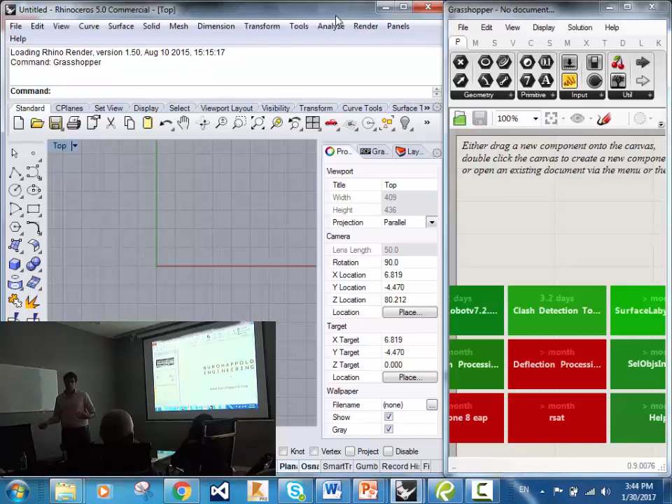So that's a little bit about what we're doing globally. Now this week, we're here to talk about parametric design,

which a lot of you know looks like this. If we could, can we turn the light on real quick? So for me, I like to start these types of seminars

by stressing one thing: this is a tool. It doesn't replace anything that you do. It doesn't replace you, it helps you. It's an extension of your engineering mind. That's all it is. And at the end of the day, it will not replace you with a piece of paper and a pen in your hand.

So that's why I always like to start off and just know that every single one of the scripts you're going to do is going to start on a piece of paper. If you're not doing it that way... I've been using it for 4 years, every single one of my scripts that I start, it starts on paper. So if I try and do it without it, I can maybe do a good job, but it's not even comparable if you're not using a piece of paper. It doesn't replace your mind, remember that.

So I have this little principle I made up that I started when I first started doing Grasshopper 4 years ago: programming equals geometry, geometry equals programming. The cool thing about our industry is we actually deliver things that are in 3D, so it really behooves us to be able to work in 3D, to understand things in 3D and set them out that way. The geometry part is the important part.

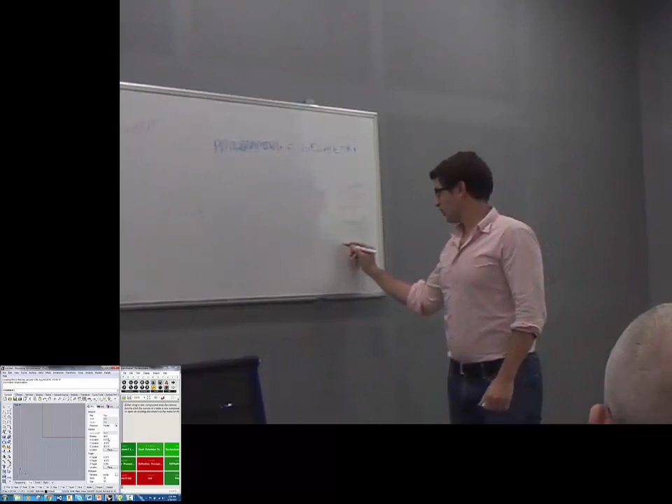Anything else? Anybody going to be a real nerd and say polynomial equation or something like that? It could be something like x squared plus bx plus c or something like that, right? Well, maybe I'm too much of a nerd. But what you guys just shouted out, that's not enough, that's too much. That's still me drawing random lines, an infinite amount of possibilities there, and still an infinite amount of possibilities here.

So we need to pick one. I would say we can pick any of them, but just because I'm ready to do this one: 3 points. 3 points defines an arc, right? We can figure out some sort of line that goes through that. And intuitively, I know there's a tool in there that will take 3 points and figure out the radius and everything for us, okay.

So that's cheating a bit, but that's why it's important to get your feet wet, because it's sort of like a self-fulfilling prophecy. The more you use Grasshopper, the more you know about it, the more you're able to sit down at this table and actually say, I can already foresee my last component is going to draw it for me, and it requires 3 points. So we know right away we want a 3-point arc, we better have a third point up there somewhere.

So right now those are our parameters. Is that enough? Is that really enough for us to do it? We need some other information. What other information? You need a plane. What else?

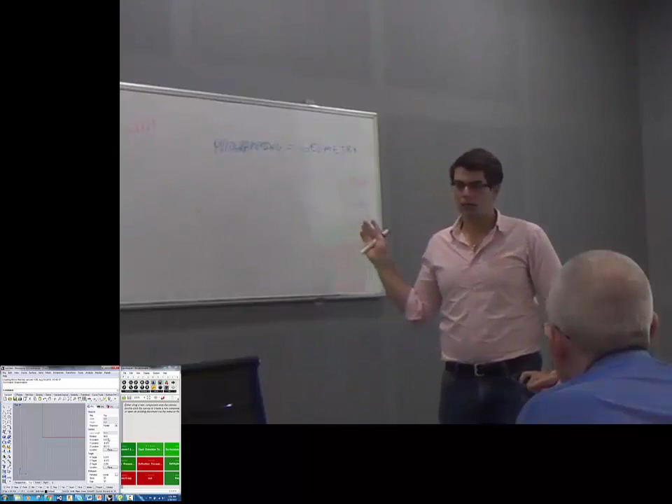Remember, our output is that. So we're drawing this picture, we're thinking our end game is this. And how do I break that down into something a computer can understand? This is the really important part of all of this stuff: the sacrificial geometry. All of this jazz over here is just sacrificial.

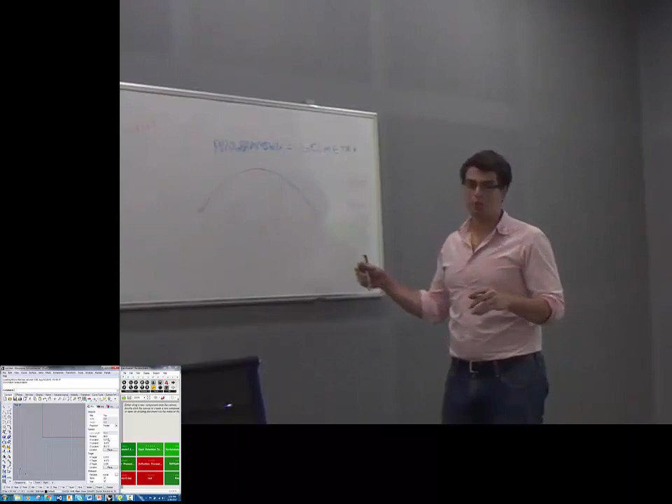We're creating 3 points to create this curve. We've got 2 parameters in here. Most of the definitions you will come up with will have more than this, actually, and it's just the amount of steps that you go through. We can walk through examples later in the week where you create so much line work just to come out with something simple. But the main benefit is once it's done, it's done forever, and you can roll with the punches a lot quicker.

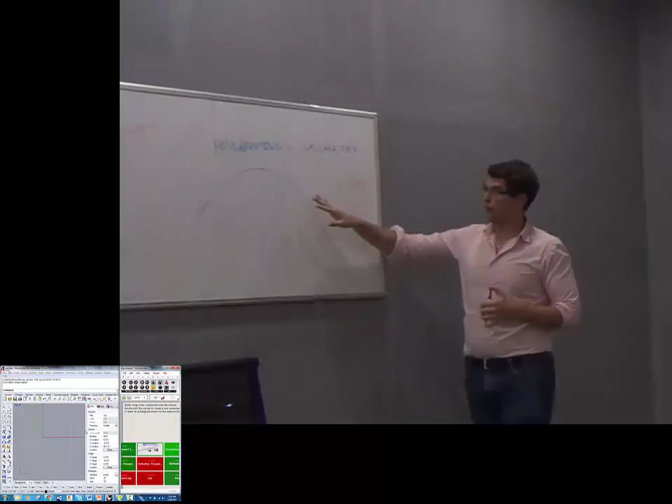So let's take this as the basis of our example here, and let's do it in Grasshopper. Before we start, I want to stress, this week we are going to try and do as much as possible without being too confusing. We're going to use Grasshopper first, then Dynamo. Dynamo is going to be really important for those of you using Revit a lot.

I go to Grasshopper first because I still submit that Grasshopper is a better way to learn. Dynamo is very new, and it has things that I just consider to be bugs. Last week I saved a file, opened it back up, and all my groups had disappeared.

That's just a little bit unstable. Doesn't mean you can't learn from it, and doesn't mean it's not a good tool. Just know, if you're starting from scratch, you're probably going to have less headwind if you're using Grasshopper. So we'll start with Grasshopper this week.

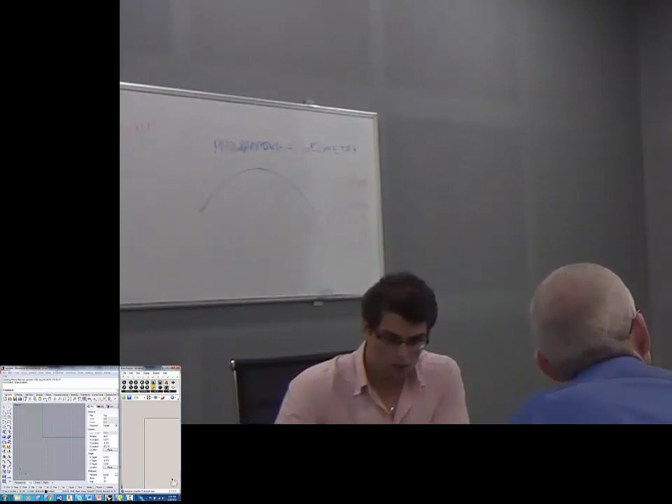Remember our principle. What was the principle that we started off with? Programming equals geometry, and geometry equals programming. So on the screen right here, what you're seeing is those two things in software form: geometry, as you all know it right now, CAD, and programming over here on the right.

Most of you know this already. The programming is not something that's scary, scary, scary. It's actually pretty easy to learn. There's something called visual programming.

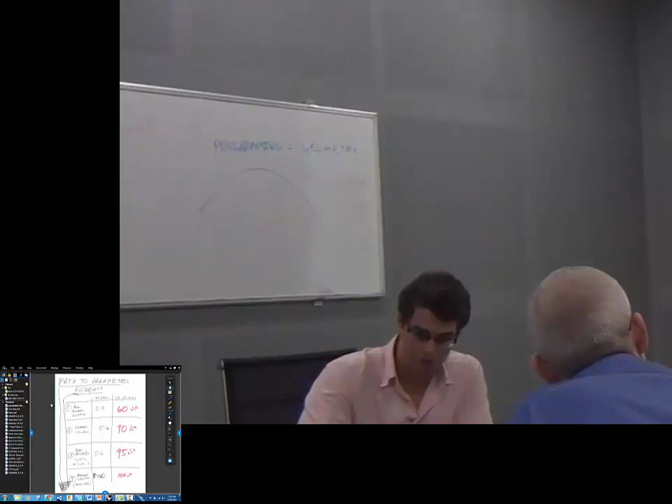Just to show you how easy I think this is, I made this little thing a long time ago. If you wanted to learn basic parametric scripting, I believe it would take you 2 to 3 days of just knocking it on, not even full days, just playing with it. By the end of this course, I'd expect most of you would probably be here.

Just to give you an example, the 60% means you're 60% fluent. You're gaining 60% of the benefits of being a parametric designer rather than just a normal designer.

I say conservatively, it takes you another 5 or 6 days to get to the data tree structures, which really puts everything we're going to talk about on steroids. We're going to cover that tomorrow. If you can get data tree structures down, you are, in my opinion, dangerous.

You could actually probably, arguably, be replacing the efforts of someone else. You could probably do something in minutes that takes someone else a day. There are examples of this.

The next level up is the stuff people get scared of, but it doesn't apply to everybody: Basic, Visual Basic, C#, even Dynamo Studio scripting. Stuff like for loops, while loops, all these things that people go 'oh, I can't do that.' But no one really likes that. We're designers, we don't like to deal with that stuff. That's not what you'll be dealing with in most cases with parametric design.

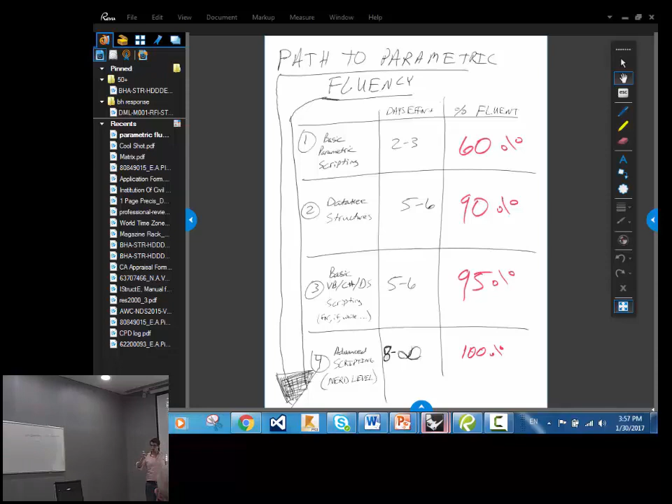But it's not hard to get to. It's almost like I speak Italian. Anybody else here speak Italian? That's right - if I got up on the board right now and taught you 10 words in Italian, you could all go live in Rome. That's what learning this stuff is like. It's that much of an impact for that little of an effort. It doesn't take that long to get down.

All right, let's do it. Any questions so far?

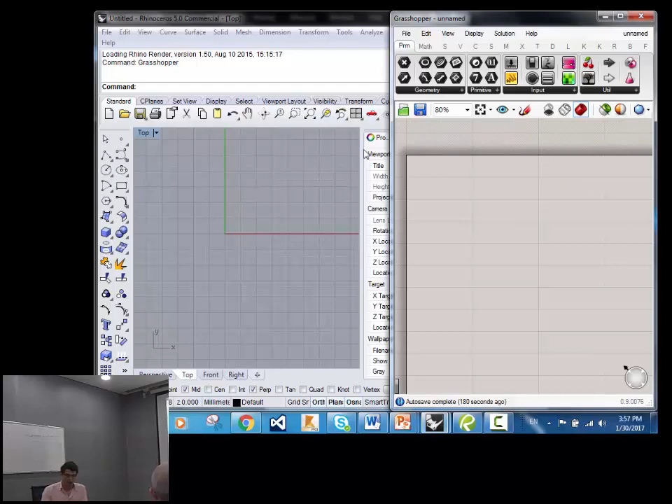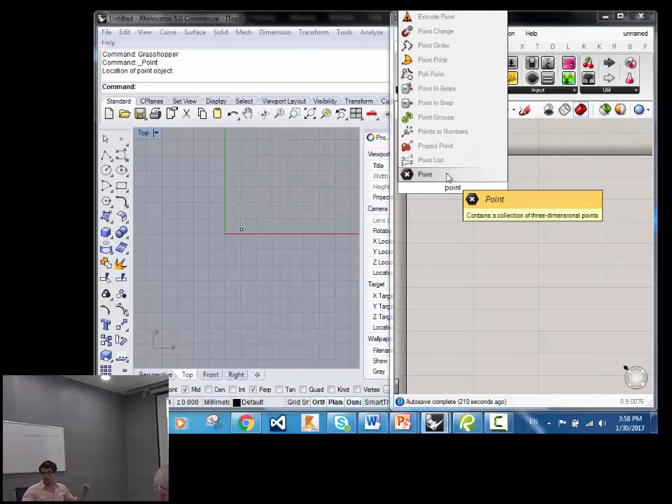Let's start by creating some geometry. There's a point. And what am I going to do with that point now? Let's say I just created that point. I need to create a second point that's a distance away from it along, let's say, the x-axis. Let's make programming equal geometry.

If I come over here, I double-click the canvas. Most of you know this already - you can type out commands. And you can make information jump across the media via right-clicking, and you go set one point. Boom.

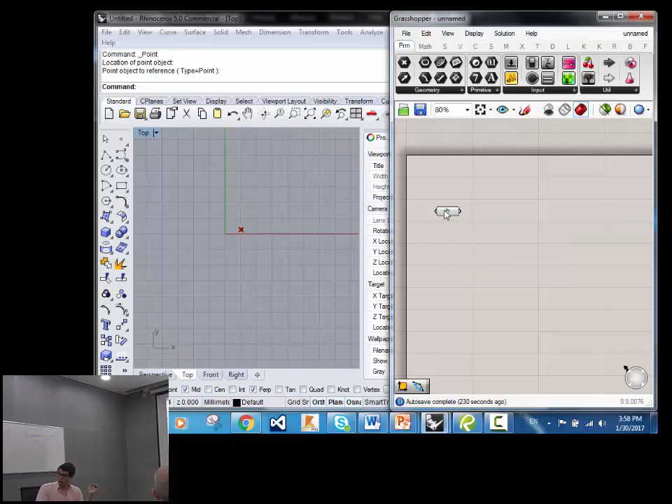If you haven't been introduced already, green mode and red mode up here, very important. If you click on something and you're in red mode, it turns green. Everybody see that? It's very important. And if you're in green mode, the only things you see are green when you select them.

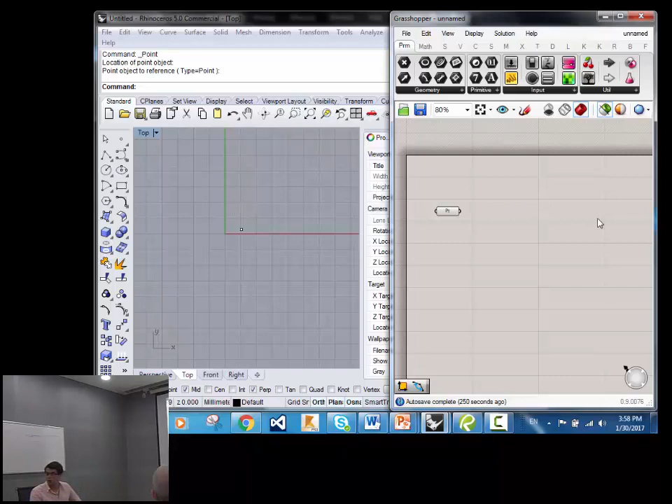Right now what it's telling us is we have a green point out here. This is a programmatic point. We can play on this in programmatic land. So for the rest of this example, we're not going to touch Rhino. We're just going to draw it using algorithms.

So we want to create this, and we already got point 1 there. How do we get to point 2? It's distance a away. Anybody have any ideas what we can do?

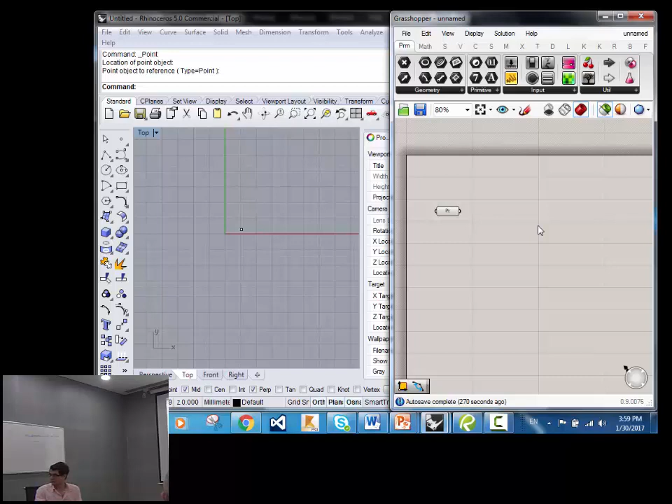Now, for those of you who aren't familiar yet, every one of these little batteries, it's going to have an input and output. It always tells you what it does. Translate or move a point along an object or along a vector. Base geometry, translation vector. Base geometry, sounds like we should put the point in there.

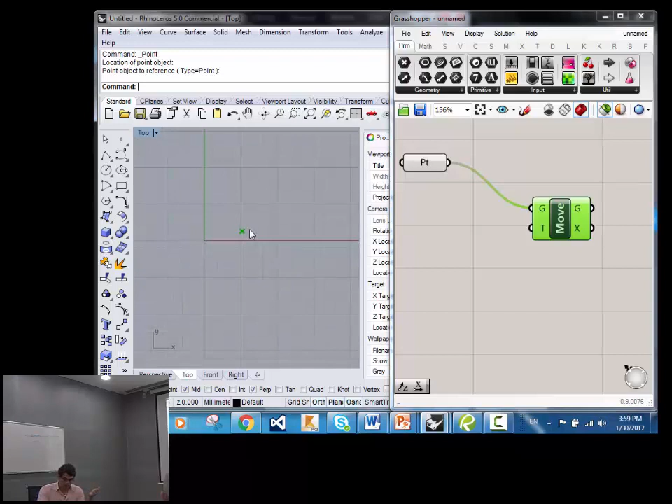Translation vector right now, it's moving it 10 millimeters in the Z direction. So we can't even see it because we're looking at the XY plane here. What can we do? Probably, yeah, put a vector in there. That makes sense for us.

Ah, we've done it. And then where's my number slider go? Behind unit X. Right here, right? Yeah.

Uh-oh, where is it? It's far away. And then, those of you who haven't done your homework yet, I really feel happy for you because you still get this awesome feeling of the first time you play with a slider. You go, ooh, ah. It never stops being fun.

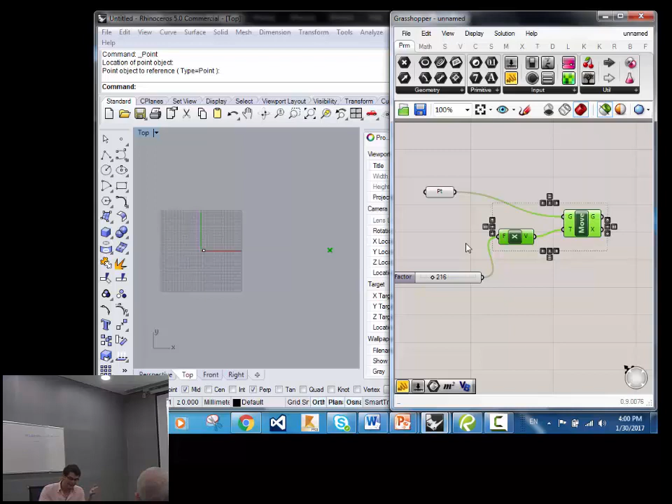So, okay, great. So that's second point. All right, crushing it. All right, anybody have any ideas on point 3 up there, the apex of our curve? How do we do that?

Moving at the same command. Moving it in Y. Which point? Same number slider in Y. Move it in Y, we can give a different vector actually. Give it a different direction.

So which points am I going to move here? I got 2 points, right? And actually, I probably should have drawn this a little bit better. Because if I move either of those ones right now, in the Y or any direction really, you get something like over here, right? We kind of know that just by looking at it.

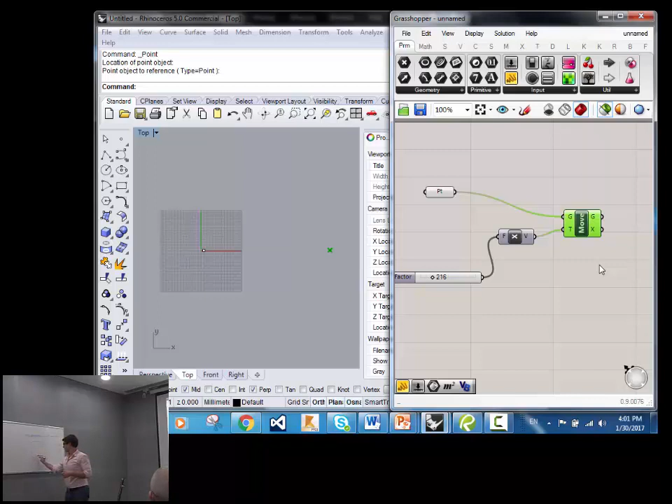So really what we probably want is, we can use 2 vectors, but trying to keep it minimal parameters because we don't want it to be too crazy, like we don't want to have to work too hard. What if we just stick with the 2 vectors we have?

What does it inherently mean? What sacrificial geometry could we create such that this is maintained? A over 2, so that it's centered on these 2 points. Any ideas? So that it is at the middle of those 2 points. It's the line. There you go.

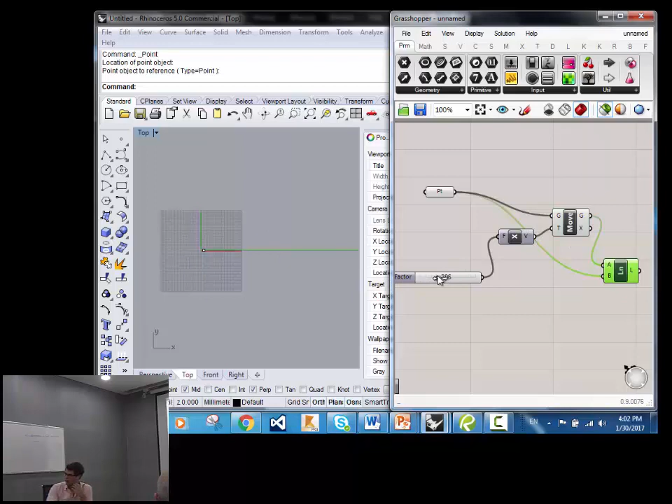So, like I said, sacrificial geometry, you can be thinking, I need to get to the midpoint of those 2 points. I could take the x values and average them, or I could do all these things. But I got 2 points.

That defines a line. Here you go. Remember, still parametric, right? And then you say, I want the midpoint between those two points. You have the foresight to say, actually, it's not called midpoint in Grasshopper, it's called points on a curve. This is just the stuff where you need to text someone on Skype, hey, what is this? Or ask around, someone will know. And then you got the midpoint.

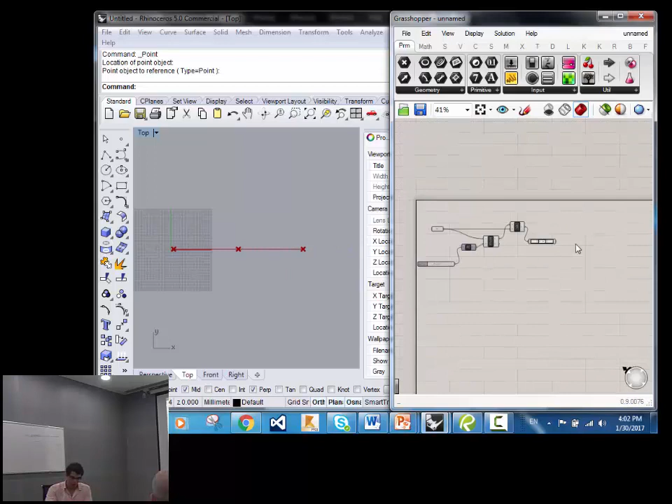So if I turn on red mode, you can see this is all just sacrificial stuff. It doesn't matter, it's just helping us get to our end game. Who was saying before we need to move, right? Now we can do the move. So we take that geometry, move it in the Y.

I think the important part of all of this, and you'll get good at it as long as you're drawing, is thinking ahead, putting the cart before the horse and saying, what is it that I want to get done? So it's not actually just this grand scheme of things, you're almost working yourself step by step backwards to the solution.

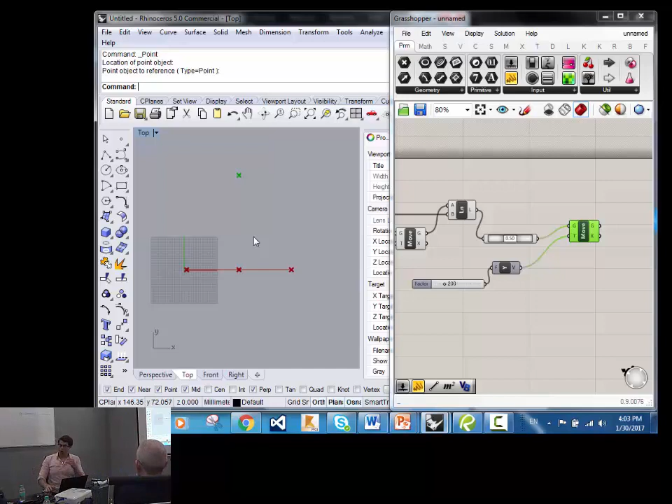Hey, how do I define this point right here? I probably need another subroutine to get me there. All week this week, you're going to see, it's always thinking backwards. What is my final thing? It's about thinking of things in a new way, about breaking things down to their core rules rather than just, okay, 3 points done. It's about letting yourself be available later.

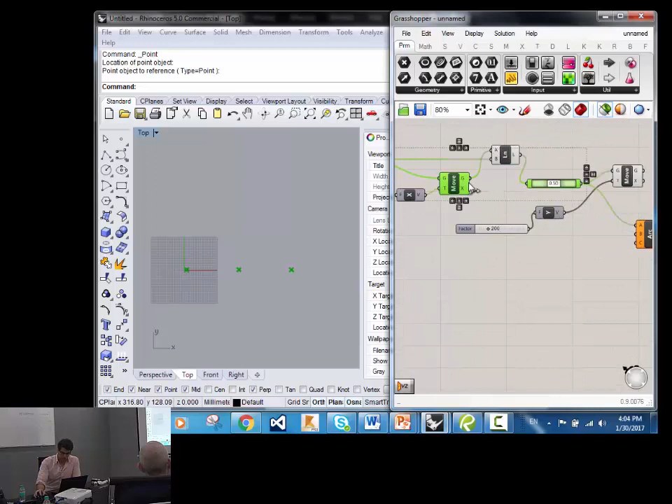And then I'm sure most of you know 3-point arc. In fact, let me demonstrate something. So I got 3 points here, right? 1, 2, 3. Good. All right. 1, 2, 3. Let's see what happens if I put those in.

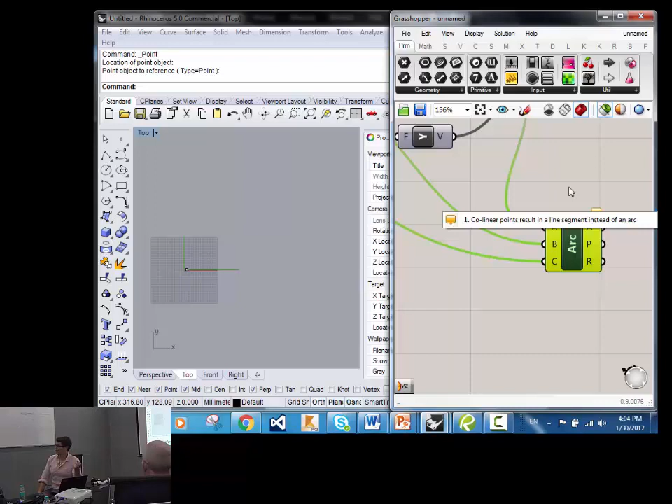If anybody's done computer scripting or even Excel knows when it looks red or orange, it's never a good thing, and it probably means like, you'll look at this, collinear points result in a, I don't care, I don't know what that means, can you just tell me what to do, and it's always some cryptic error.

In this case, it's always beautiful because this is called, I call it visual debugging. Rob May had taught me that term, and I think it's a beautiful term. It's literally being able to look at the problem, a little picture, and know, what's the problem, guys? What's the problem with this picture that we're trying to do here? Why is this thing orange?

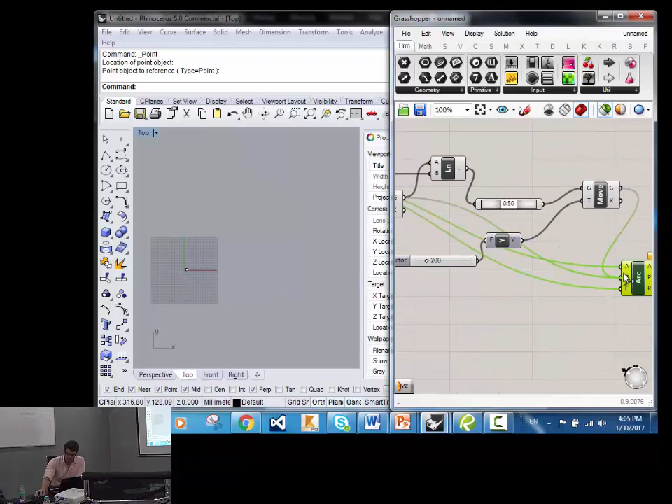It's a line, yeah. We can't actually use this component because mathematics doesn't allow us to. So if I actually use this one, not really what we were looking for either. Why? It's because it's in the wrong order.

So, okay, let's go. 1, 2, and where's my head? Bada bing. And now, every time the architect wants to change your arc, you got it. It's not going to be as nice as drawing it by hand, but it's ready to be changed at the drop of a hat.

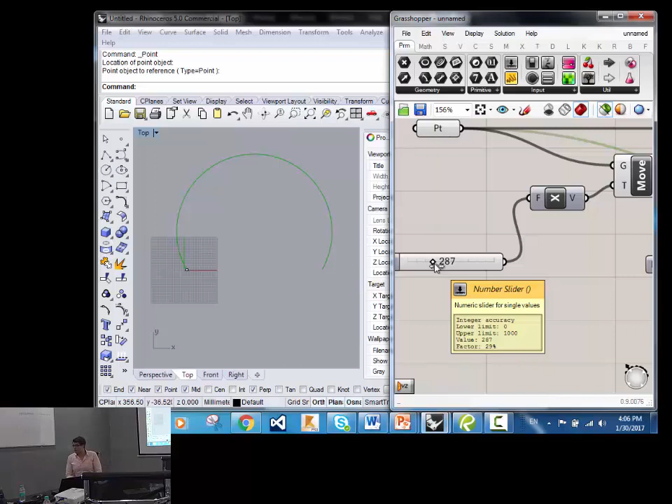I chose this problem first 4 years ago because I was really interested in seeing if a computer could determine the best arc for structural loading. So just letting it bounce around and figure out the best almost funicular shape of the curve. Obviously I used more parameters than this, but that's where I started.

And it would be nice if, just based on this, you're not doing anything really complicated, you're not dealing with data trees, you're just dealing with lists of geometry. And everybody else start to think now, okay, how does this affect me? What does this problem show me that I could work on now?

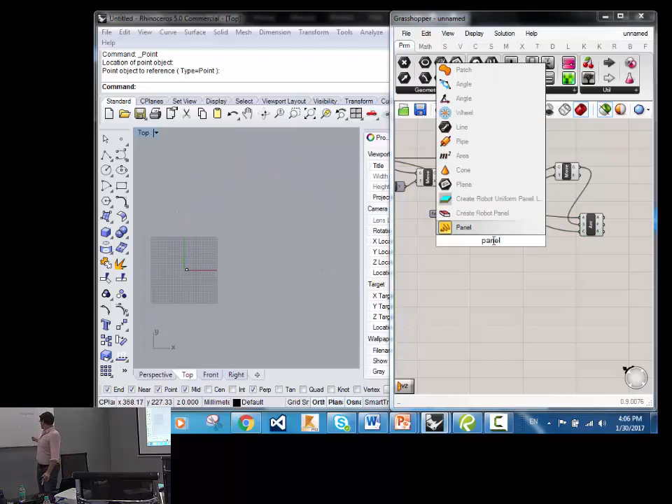So there's our arc, completely parametrically defined via this, okay? And there's nothing in here that is hard to understand. It literally is, if I pull out a panel, most of you know, I can just look at this and be like, okay, like there's data. It's just lists of data. Right now there's no list because we're dealing with one thing at a time.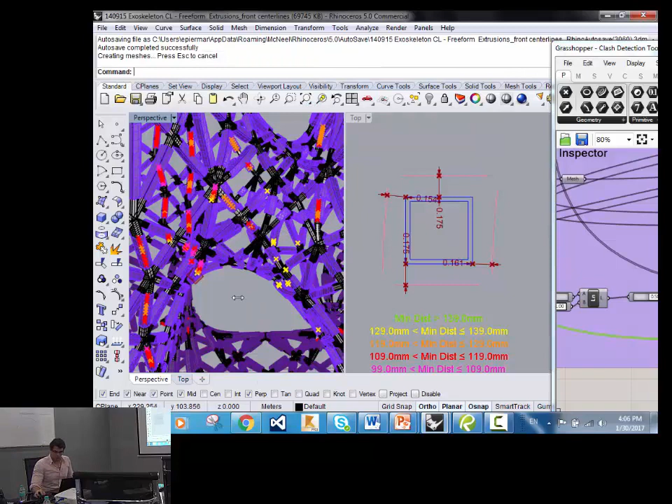So that's why I have another example which we're going to talk about today and tomorrow. So, what did we have to do?

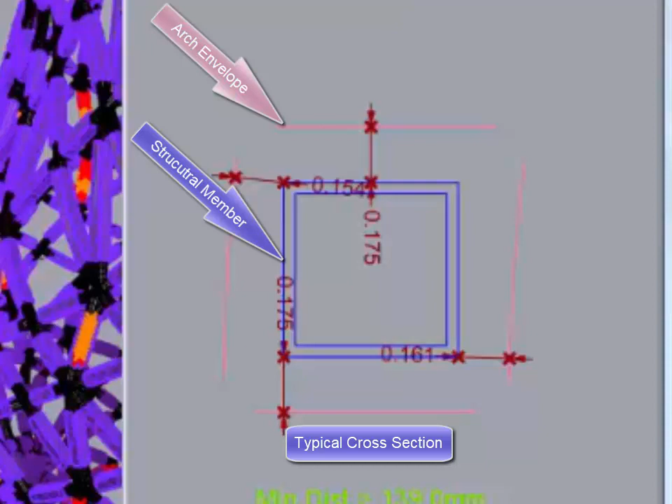We needed to determine in all of the freeform zone, which is what you're seeing here. I can't really zoom out because this computer isn't so powerful. We had, along any given member on a section, I'm going to draw it weird, some sort of architectural envelope, and awkwardly placed in there a structural member.

Don't worry, it's just geometry we're going to talk about, we're not going to talk about the structure. So you guys can imagine, we were told we need to be able to be within a certain tolerance of this line and this line that the architect gave. And here's our member. This is just geometry, we're not talking about structures.

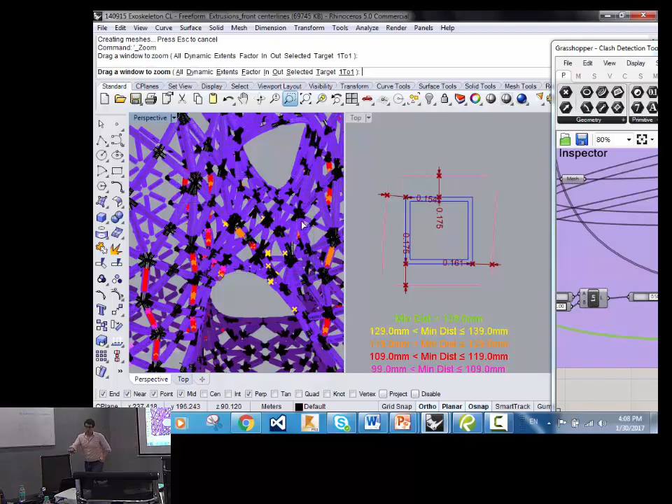But our geometry is already defined, as you can see. It's just black geometry right here. Zoom in a little bit more. Okay, so there's the black geometry, and you can see the purple geometry goes around it.

The purple is what I've drawn in red up here, and that's all you have now. It doesn't matter anymore how it was set out. All you have now is a geometry problem. Where on these members is it that we deem a clash? So we had to go through and actually investigate in 3D for all of these members.

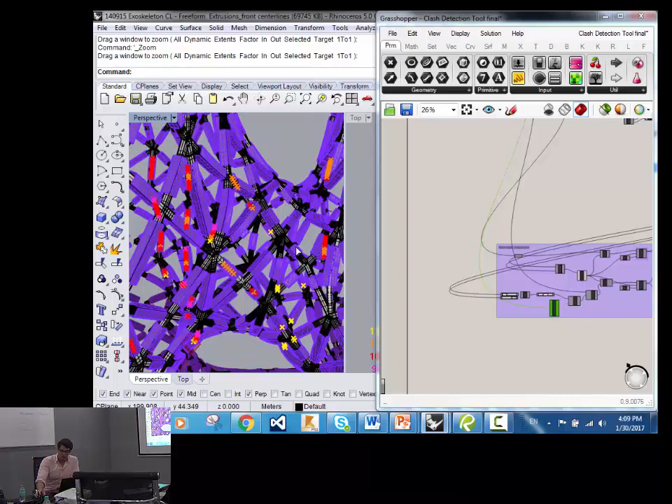I think what a good exercise is for everybody going forward, and I think afterwards what I did in Hong Kong is I just issued one of these members and I let them use it as a homework problem. So you would have the exact same inputs that I did going forward, and you could try to determine how to make the tool that I'm about to demonstrate.

So let's look at this a little bit closer. As I said, mess, absolute mess of geometry, and you got to be able to make sense of all of this. So the first thing that you would likely like to do is at least be able to inspect each member, like get this type of picture to understand at each level how is this actually looking. Like to us that's a mess. You can't actually make sense of that.

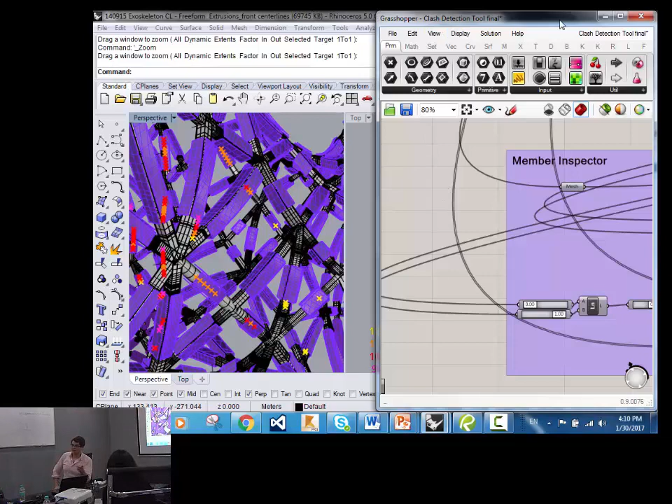For those of you who use 3D CAD or Rhino, you know how much of a pain it is even to measure along the length of something in 3D, how close you are. It's almost impossible, and we had to do it for all these hundreds of members.

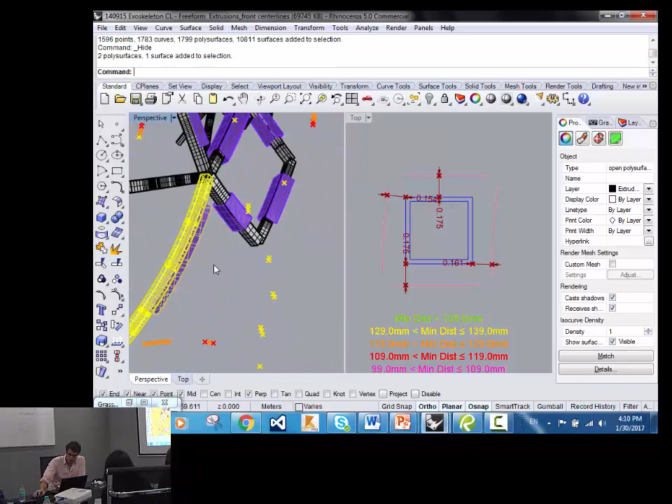So what was the first step on this? Let's see here. Let's isolate some geometry. All right, that's better. Don't worry about the points right now, that's those.

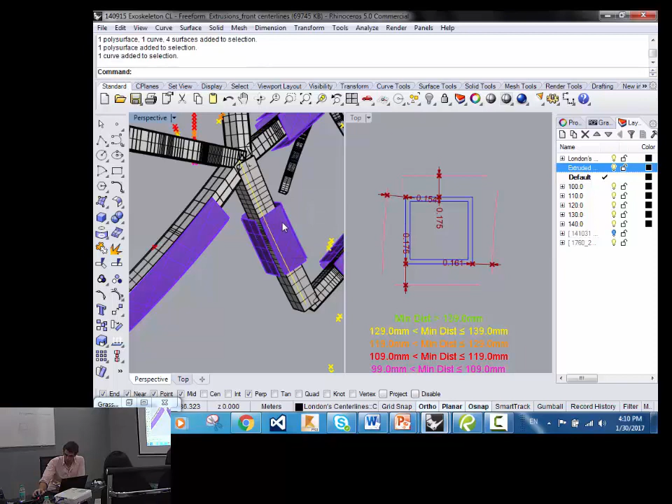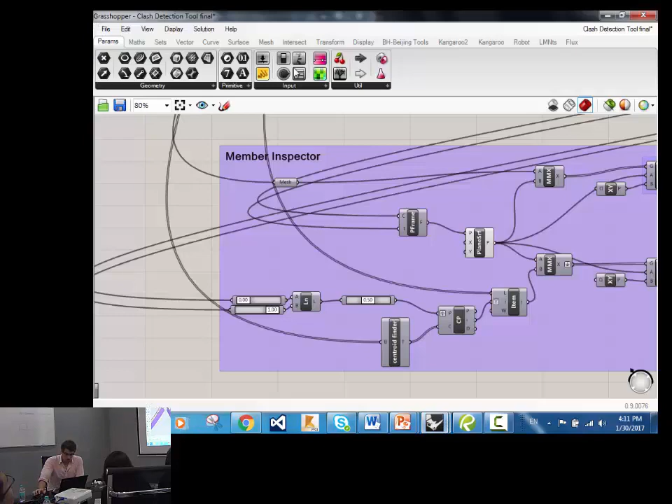So here, I got my architectural envelope here. I got what Buro Happold just says the member should look like, and somewhere over here I have a center line, London center lines. One curve is in there. So that curve I took to be the basis of what we're going to use, all right?

So what we can do, I'll show you how the tool works, then we'll explain it. Grasshopper. So set one curve. All the other information has been put in here.

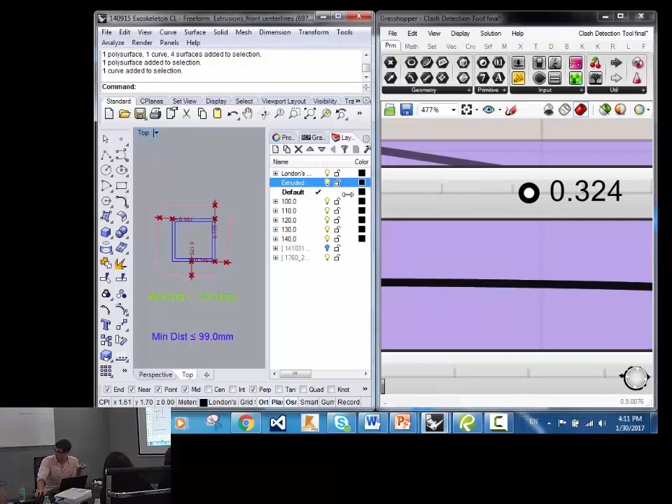So all the other geometric information for the architectural envelope, for the 3D geometry, has been put in there. And what I wanted was a tool that could go through - I picked a really bad example. Let's see if we can find a better one.

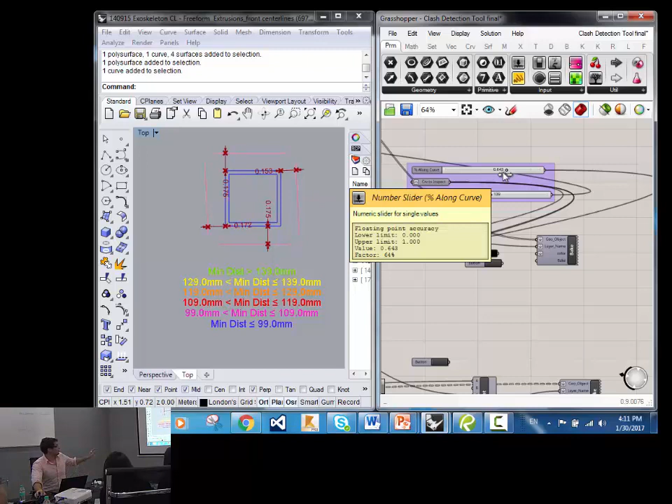I wanted this as a picture. I wanted to just be able to take my slider and see along it. It's hard to see on this one because it's not that bespoke, but you can see as you go, our member goes through. Our member is relatively straight in comparison to the envelope. The member is warping around it and those values are changing.

So this is step number one, is to be able to use essentially lists of data to create something like this, a nice visualization tool. Remember, the end game for us - this was just a nice little checking tool, an extra tool. We need to be able to do this on steroids, for hundreds of members, for hundreds of points along the members. But you got to learn how to walk before you can run.

So, anybody think right now, can anybody tell me how on earth I went from poly surfaces from the architect, poly surfaces from Buro Happold, a line, to this image right here? Does anybody have any ideas? Data trees? Nope, no data trees in what you're seeing here yet.

Tomorrow we'll talk about data trees. Remember, I got 3D information. Now I got 2D information presented here with you. Don't worry about the dimensions and stuff, we'll deal with that later. Actually getting this picture up.

And remember, this picture - this is exactly like you did before. You draw this, that's one thing. This time this took me 1 second, this took me 10 seconds now. So we're 10 times as fast to draw the picture. And now, just like before, you could draw any arc you wanted. Good luck drawing 10 seconds at a time all of these profiles. I beat you every time at that one just because I scripted this.

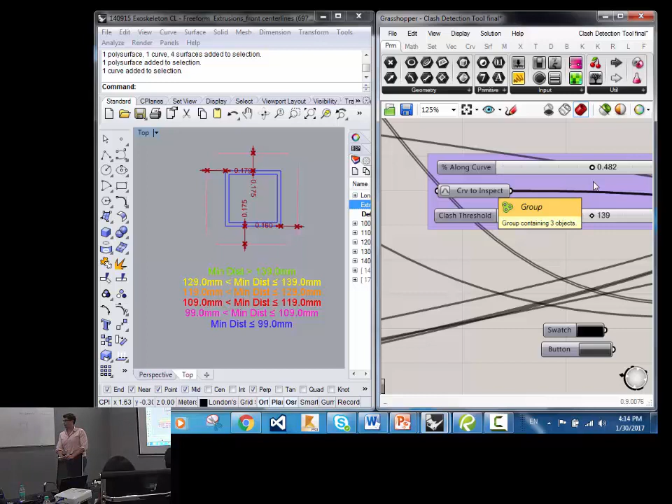Okay, so I took the center line from the architect. Yes, and the four points came from wherever those center lines are getting connected - you will have one node, one structural node, where all the structural things come together.

But remember, we're not actually looking - let me pull this up. We're not caring about the nodes on this one, we're caring about along the members. I think you know that we did a lot of the node design, right? We're talking about actually the members.

So look at the left and right as I go through. You're doing the sections actually. Bingo. So right away, those of you who know 3D CAD - I just asked you, can you please go in here and tell me at the halfway point what this picture looks like? The first thing you would do is create a perpendicular plane, intersect some geometry, and then actually play in 2D.

CAD software, as powerful as it is, we don't play actually in 3D. We play 2D planes at a time, which is why Grasshopper or Rhino always has the isometric view plus elevation, plan, and section.

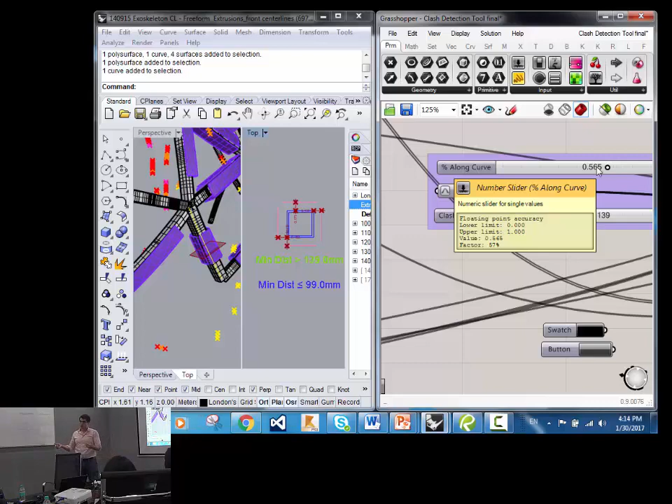It's just easier to work that way. So in this way, Samir is right. We knew right away that at the heart of this, you needed to take a section. Let me just step through the script to show you guys exactly what's going on one step at a time, because this is also a very valuable skill.

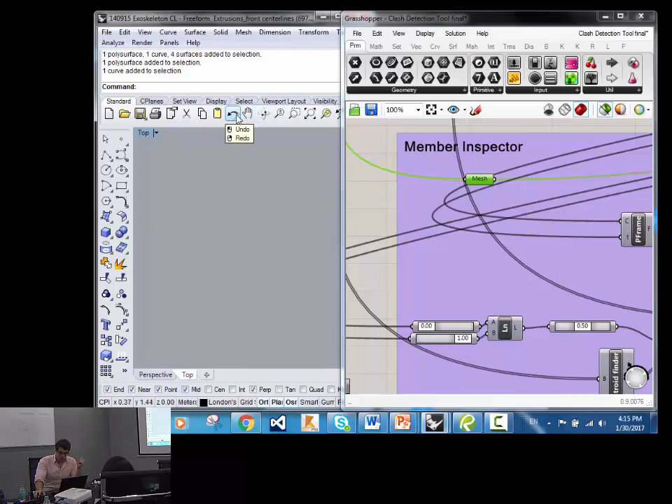In green mode, when you're scripting, click through as you go. So what comes down? A mesh. What does that mesh look like? Mesh, architect's mesh. Green mode is going to try and show us the center line here. That's the center line.

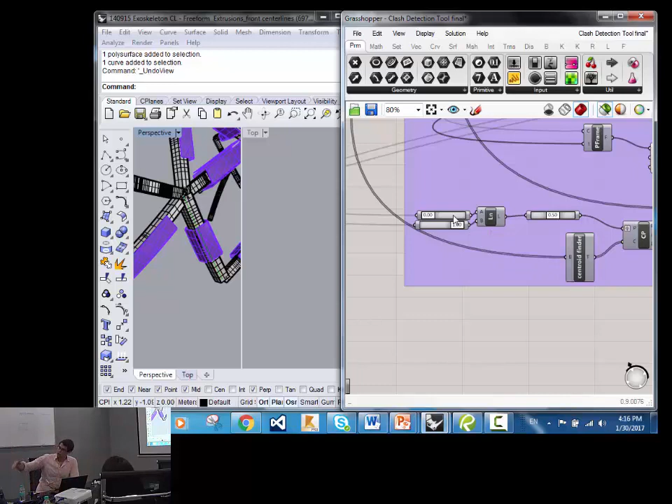What do we do here? Let's see, 0 and 1. That's that point-on-curve thing you showed me before, right, Medio? So what I did was I took the curve and just made it a straight line. This is for reasons we won't get into here—remember I was talking about subroutines of subroutines.

It really becomes more important to scrub your geometry, which is what we're dealing with right now in Swan. You always have to scrub your geometry.

We're going to deal with this part of the script on Thursday. It's a really important part. It's about geometric searches—let's not worry about that right now.

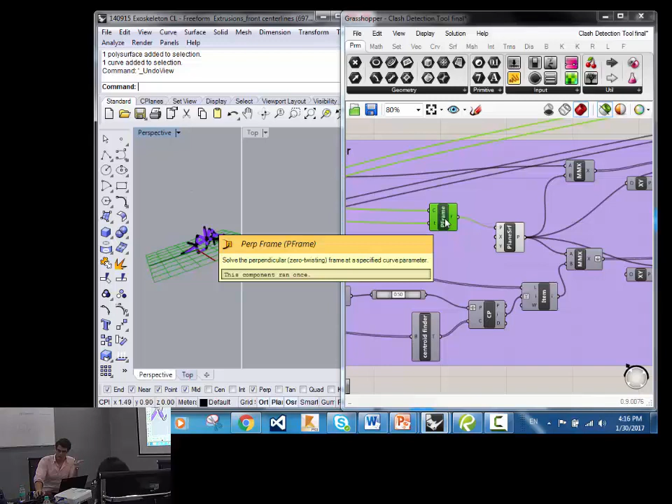What is important is, along that member, I create this perpendicular frame. Perpendicular frame is a really important one to know—it's just exactly what it sounds like, it's along your member, perpendicular. And we knew that was going to happen.

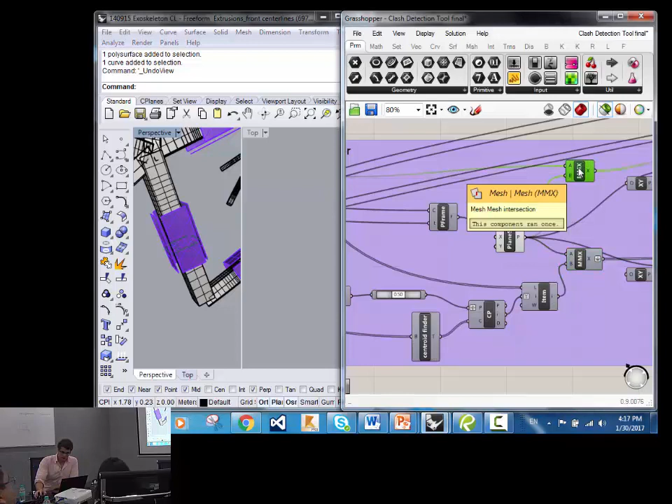Create a plane surface, okay, that's fine. And there's the intersection that Samir's been talking about. That one is between our geometry and that plane. And then there's another one here between the architect's geometry and that plane.

The important part to know right now is if I hover over one of the outputs, we know it's just a list—nothing fancy going on here. It's a list of 4 lines. It's a list of 2 polylines, so it's 8 curves, right? Because this one's a solid rectangle or solid section.

And then that's it. We actually have exactly what we've been asking for, the dimensions and stuff. That's a game we'll play on Thursday because that involves a bit of a higher order analysis.

The only other thing we do here is we say, hey, it would be great if that picture right there isn't too useful to us—it doesn't really help us, it's in 3D, we don't like that. Can we have that as a viewer somewhere? And the answer is yes—you use something called the orient tool.

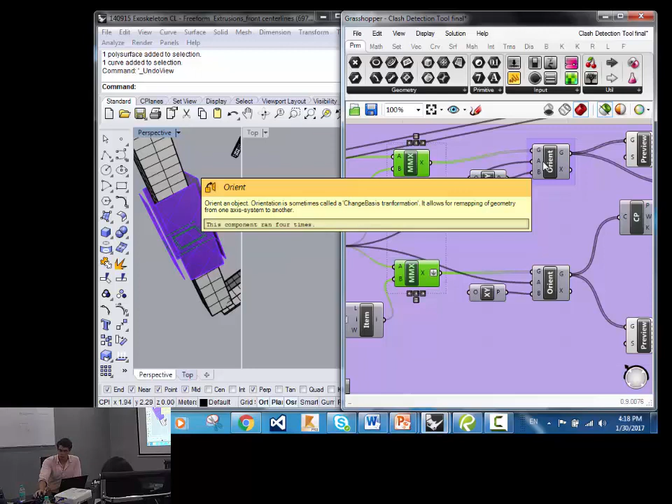Once again, it's just a list going in, and you tell it: please convert this geometry from one space to another. The space you're in right now is the plane you created. The other plane is XY. And sure enough, it brings it over.

Then we play some games here. I don't want to talk about them today—they're not hard, they're just for Thursday. All right, let's leave it at that. But all of this game right here is just for us to be able to pick out the right points in that mess and create dimensions. That's all—that's the only games we played.

Do you even realize that for even this conversation right here, when we were doing it, the conversation of how you define 'close' starts to matter? If the facade brackets are coming out perpendicular to the member, it's different than Euclidean geometry, which says the closest point from here to here is a perpendicular line on here. One is perpendicularity here, one is perpendicularity here.

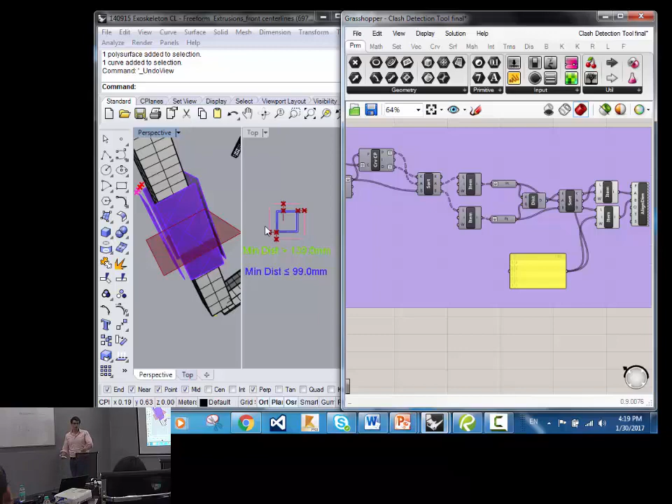It matters. The first time we sat down—another key principle of this—this morning with Shival and Vimal, we're talking about Swan Lam. Geometry is important, sure, but information is even more important.

First meeting we sat down under these tight conditions, we literally just sat down and said we have to come back or reschedule, because every single party—the contractor, the facade contractor, as well as us—we're using different information. So some of us had different information for this stuff, this stuff was different, center lines were different. It's a mess.

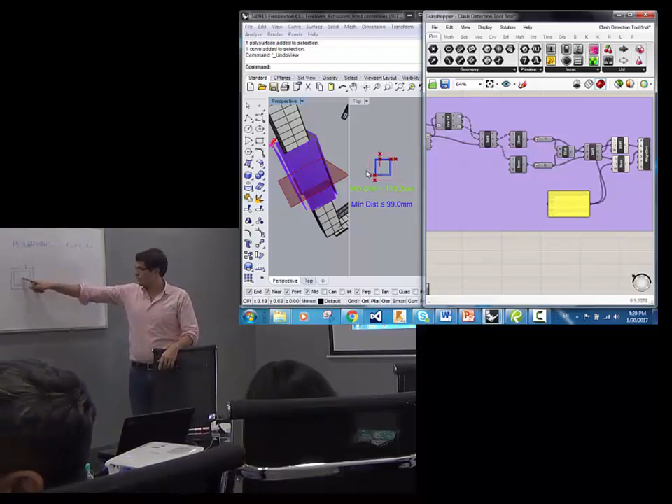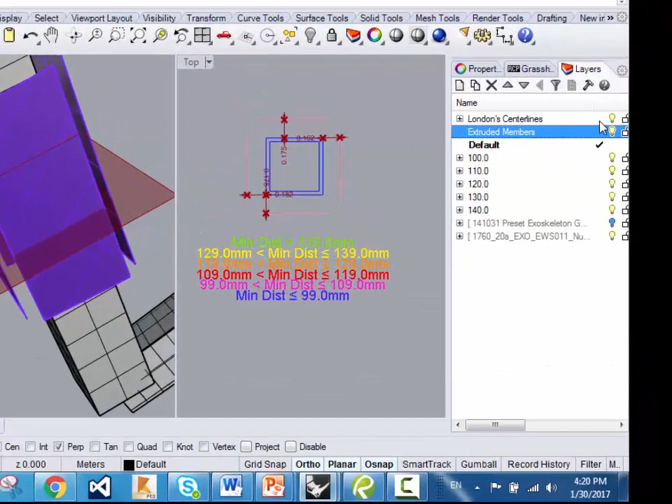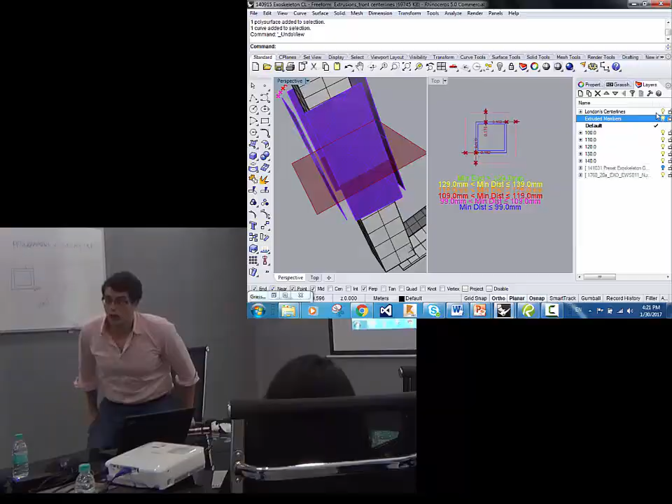It really becomes important that you understand that if the beginning of my script is something called curve, when I right-click and reference it to something else, what you reference it to better be the right thing. We had this conversation this morning for Swan Lung. Normally we'd go and say, oh, somewhere in there there's a file to reference from the architect. We don't change the name of it, but it's not right there, it's somewhere behind the scenes. On this one, that's Zaha's nomenclature, this is our nomenclature. That's literally what's in the contract documents, and that way nobody can argue with you. It's like, I'm using the geometry, I'm not changing it at all, I'm just extracting data from it.

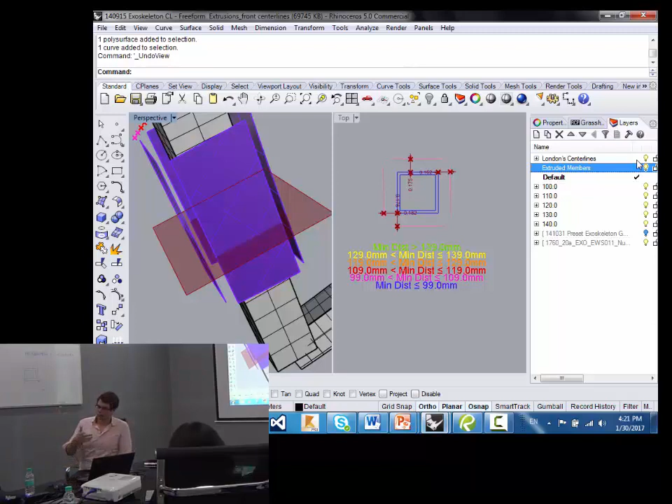And that's lists and basic scripting. If you guys watched the guy from that conference, I sent out that link, very inspirational stuff, because with this tool at your helm, what we didn't show here today but we will, is it gives you a lot more power to see things you never thought possible before, because you can only think of so much at once. But when you have this, you can really start to break down a very complex and messy situation to its nuts and bolts. And maybe if this was still being designed, and we were the facade contractor, we could actually use this tool to come up with something very intuitive.

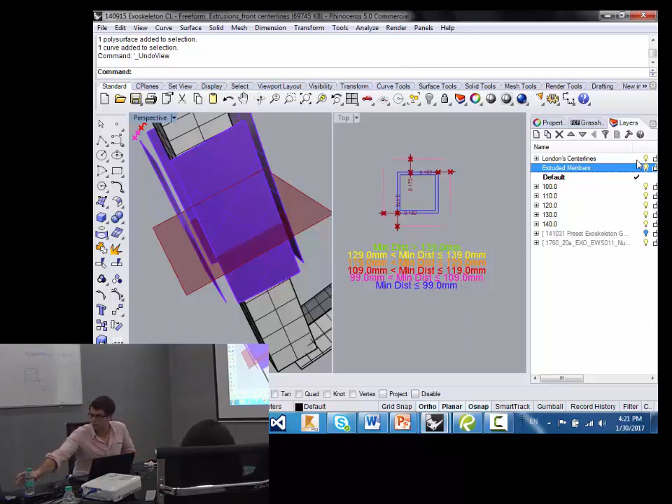So, I think we've got 10 minutes for some questions, and then tomorrow we'll talk about data collection. So, any questions?

How was this converted into drawings, normal working drawings? So, for this, for the contractor to execute?

For this specific instance, what we did for City of Dreams was we knew that with the complexity of that freeform area, which you saw, we would never get away with doing your typical leisurely thing on our jobs where architect works in 3D, gives us 2D, we take that back to 3D, we give the contractor 2D, 3D back and forth, back and forth. This wasted resource, this friction, could not happen with something as disgusting looking as that. So we agreed with the client a long time ago that we would deliver 3D information.

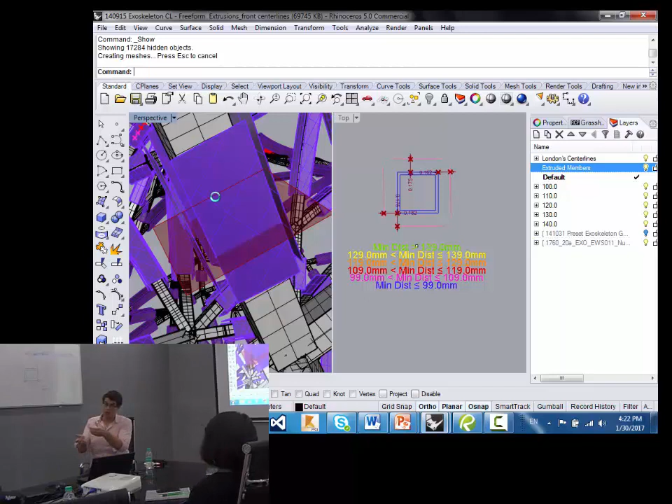The members themselves were set out via centerline models that had just the center lines of the members, as well as an orthogonal vector that defined the orientation of it. So all of these are planar curves, so it could be done that way. For the node design, which a lot of you might know, the structures guys especially, the deliverable was all 3D polysurface plate design. So it went out that way, there were no 2D drawings. There were two details on how to put it together, but the actual setting out was three-dimensional. And you couldn't do that had you not had something that allowed you to quickly, rapidly spit out 3D information.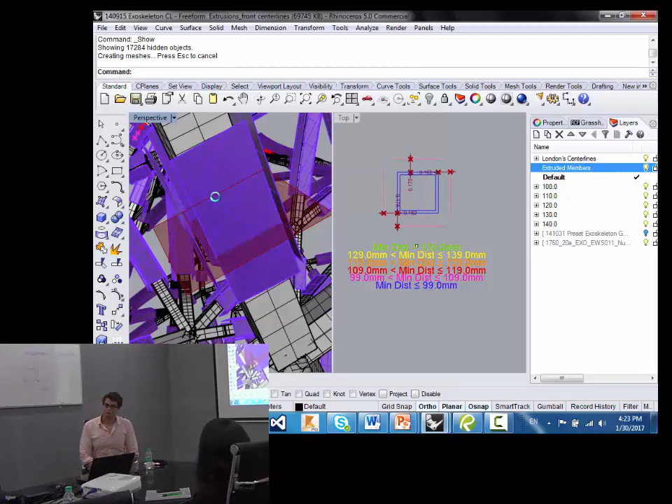At the guts of that three-point arc example, I know it's not necessarily the most interesting one, it's not the most useful one, but that is the guts of what's here in front of you and what made City of Dreams, XRL, and a lot of these projects in Bath and London, that's what it is. Is that a nice question?

And eventually, this morning Siobhan was telling me that you guys are actually delivering 3D information on some projects already, like the Revit models. So I think eventually clients will catch on that doing this 2D dance is costing them money, and to push something across in 3D is going to be necessary. The thing is, if you're only passing on Revit, that works for most buildings, but it won't work for every building, especially technicians in the room know. Revit has multiple shortcomings, it's not a perfect tool, it's just there for your bulk of the buildings.

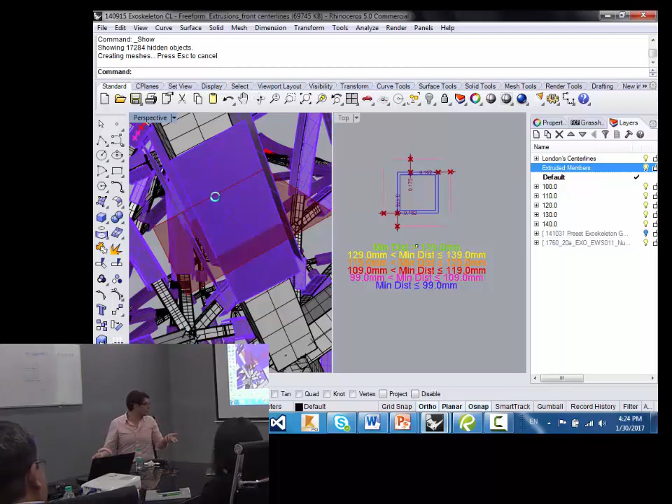So when the geometry came in from Zaha for this particular project, did it have any mathematical form or is it completely abstract? If you look online for the first rendering from Zaha's, as far as the exoskeleton goes, I wish I had a picture of City of Dreams. So does everybody here know City of Dreams? Yeah, okay, just to be clear.

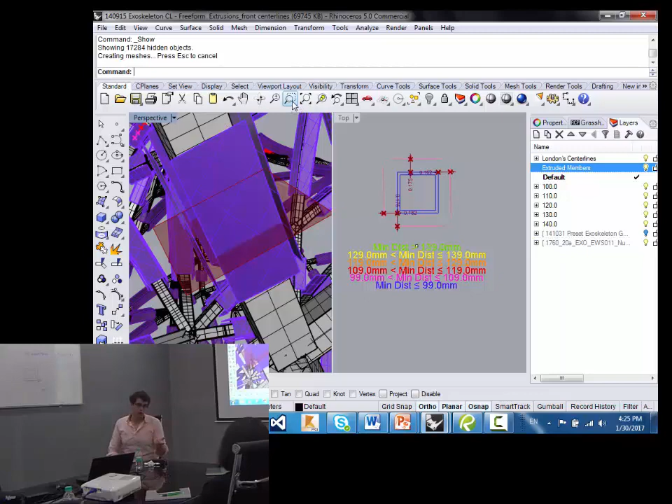It looked like Spider-Man when he shoots a web, it just looked ridiculous. Like it looks awesome, don't get me wrong, but as far as the structural engineering goes, there's no vertical lines on there, it had no rationale. So I think what they did in London, I think Wolf was over there, he rationalized it a bit to make sure that we did have proper load paths and whatnot.

But in what you're seeing right here, it's going to be hard for me to zoom in on it. Let's try. When you talk about the actual detail, the nitty-gritty, which is what we've been going on and on about for a couple years now with City of Dreams and the connection design of the exoskeleton.

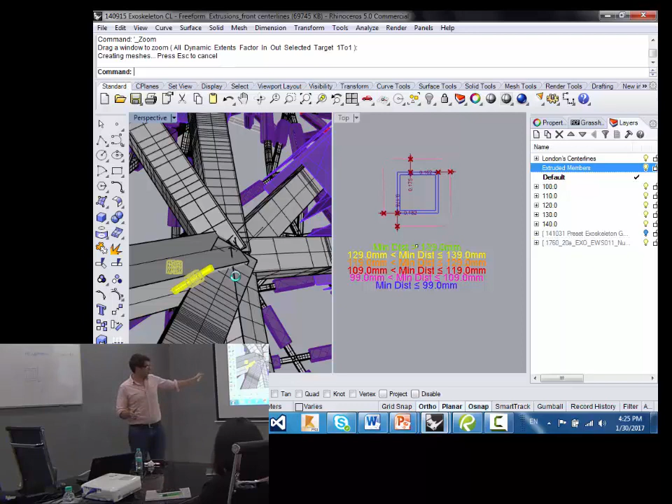It was so important, so special because of this picture right here, because you can rationalize these members before they were warping, or could have been warping. We rationalized those members internally in London to make sure it was a planar curve, so it was easier to fabricate. But that's the reason why, as you sweep through this thing, these values are changing, which makes it a lot more difficult.

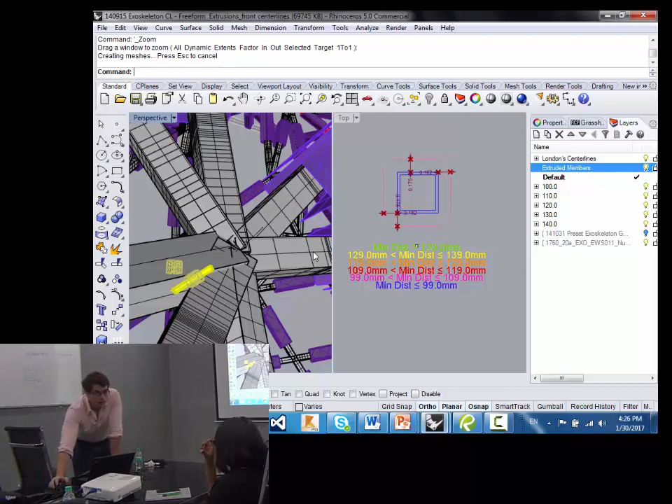The difficulty comes out now in the facade brackets rather than the member. That's okay, they can handle that. So it's a planar curve. The members are all in one plane. Yeah, one plane curve. And then the only issue is you push some difficulty away from the fabricator for the members, you push it to the fabricator for the facade brackets, and then you push a lot of difficulty for what happens right here. So it's just about managing, hey, where's the best cap?

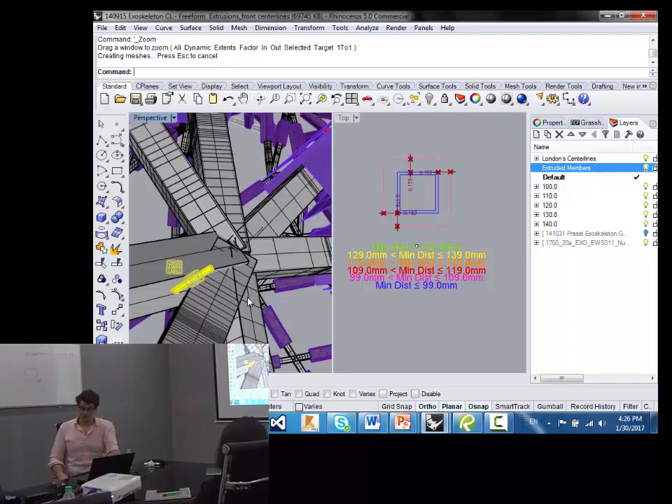So every node is a planar node, or it could be non-planar as well. The nodes are a different story. The members themselves, all of them can be taken and just laid on the ground flat in one way, shape, or form. Some of them are like this literally, but you can take them and put them on the ground, they're flat. So at least two of their sides are planar if it's a square hollow section. That drastically helps the fabrication, but for the nodes, that's a different story.

That's what you see on the screen right there, for designing, like, how do you combine and do all this. So all this data that we see on the screen here, right? Like we said, we have these extruded sections, which was another script. Remember, all we issued contractually was lines.

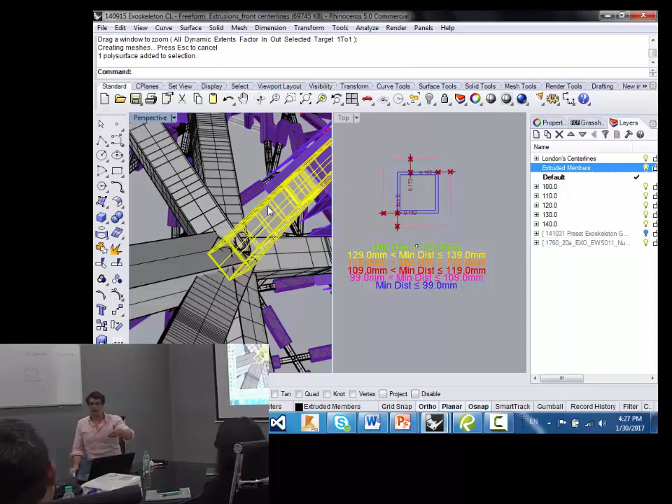You gave them a 3D line, and you gave them a plane, basically, and a section in a table somewhere. So we had to first say, contractually, what is it in 3D that we have? We actually didn't know at first. There was no central file that said, hey, this is what we're actually issuing, because we issued it like, kind of typically, just said, hey, sections, and also this is a little bit to help you set it out.

First thing you do then is come out there, you draw that business, right? You extrude it along, and that's how you see the black. So first you get that up there. The center lines came from London, but we had to process those a bit, as you saw already, to make it work with this particular script. Little detail stuff, nothing to worry about.

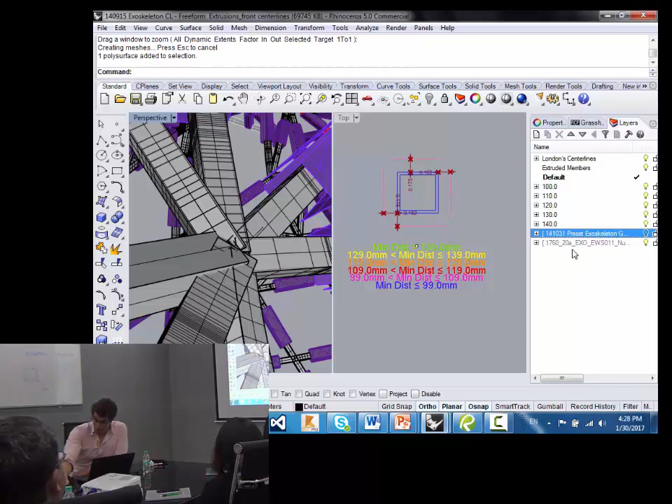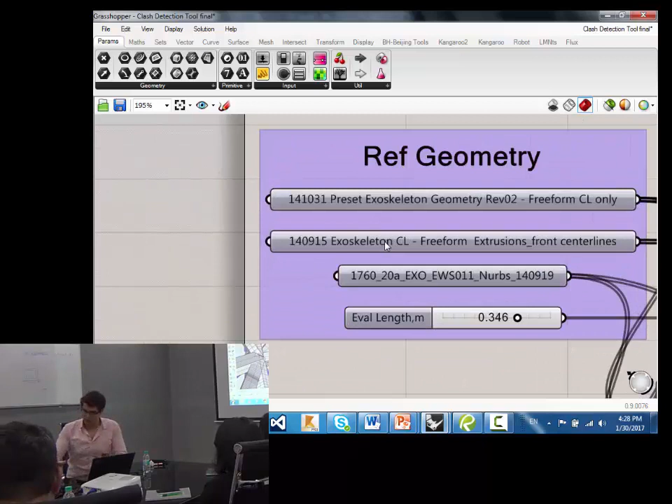And then there's Zaha's, right? And your question is how do you manage all of that? Like I said, first of all, the important thing is you know that this is the law. So everybody in their report is going to say, we are using 1760_20a_EXO whatever for Zaha's information. That's law. And then you lock it. So you can see it's grayed out here because you're not allowed to touch it.

And then, literally, it's exactly like the parametric arc. You see it right here. Zaha's information, our centerline information, our information, exactly how it looks on, we were using Egnyte, so all the information was on Egnyte. So no one could say, Buro Happold, you're using old information. And then from there,

which we will talk about in due time. Tomorrow is going to be, the big difference between tomorrow and today is this, is all those brackets right there. Those brackets mean increased productivity. You're doing things multiple times.

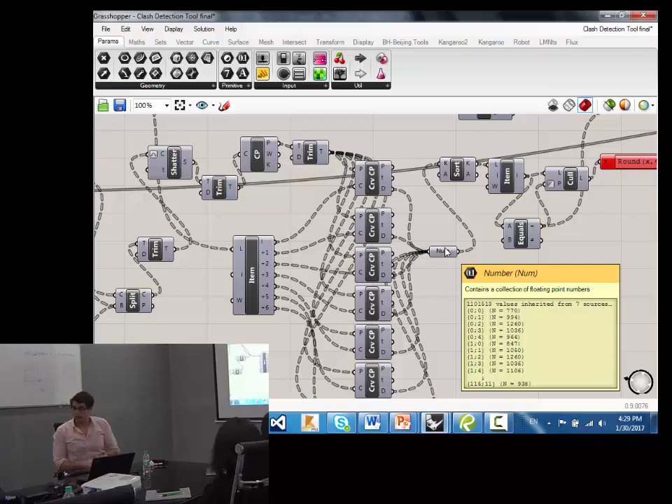So tomorrow what I hope to get into is saying, great, I don't expect everybody to spend here all night trying to do a sweeper, but if you're at lunch or something and you want to try something, try and make a sweeper. Like, it's not that hard. You can just see if you can intersect something and transform its geometry to somewhere else.

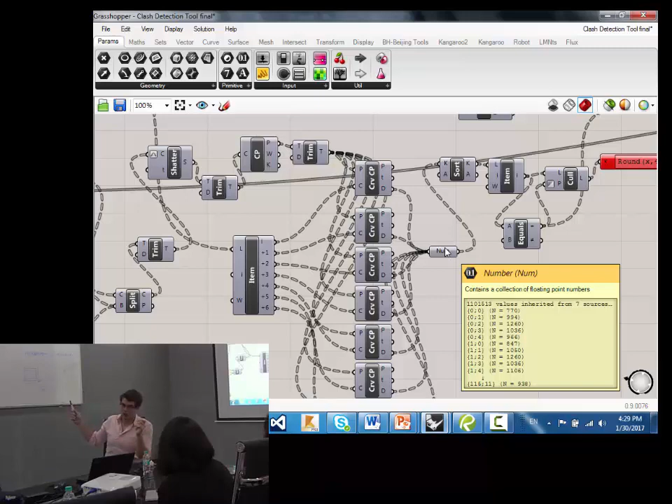Tomorrow will be the interesting day because tomorrow is where the money is. You might have just saved 10 seconds per time. Now we're going to save 10 seconds per time for 1,200 times. And that's really where it starts to become, wow, you're on a different level. But baby steps. If you get down this stuff that we talked about today, you're 60% parametrically fluent and you're crushing it.